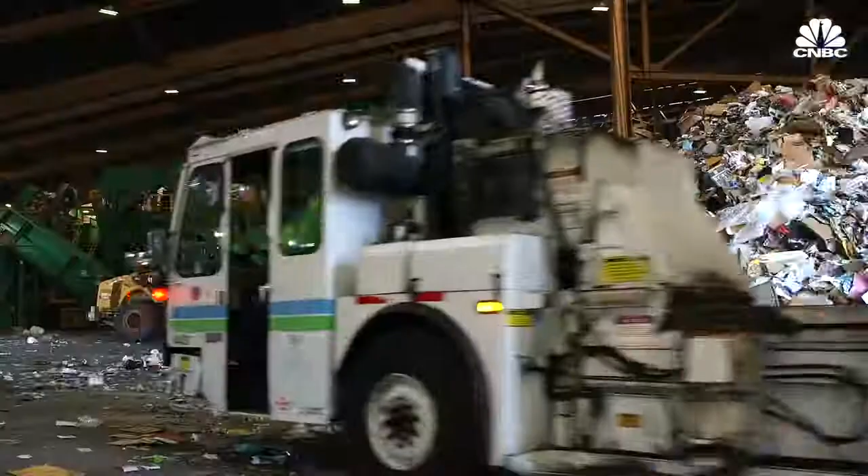Our society produces a lot of waste, over 2 billion tons per year, a number that's expected to grow by 70% by 2050. That's a line of garbage trucks stretching from San Francisco to New York City every single day.

Organic materials in landfills decompose and produce methane, a very potent greenhouse gas. Solid waste, plastics, paper, cardboard, there's a lot of energy within those, carbon and hydrogen. Why don't you do something useful with it?

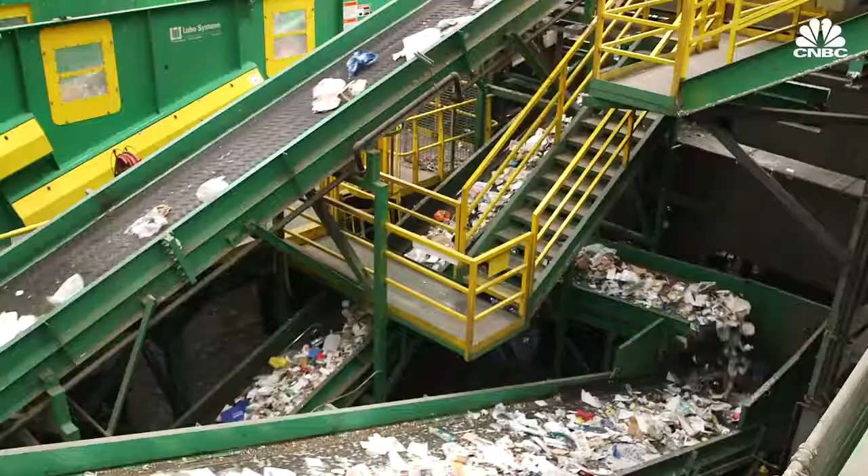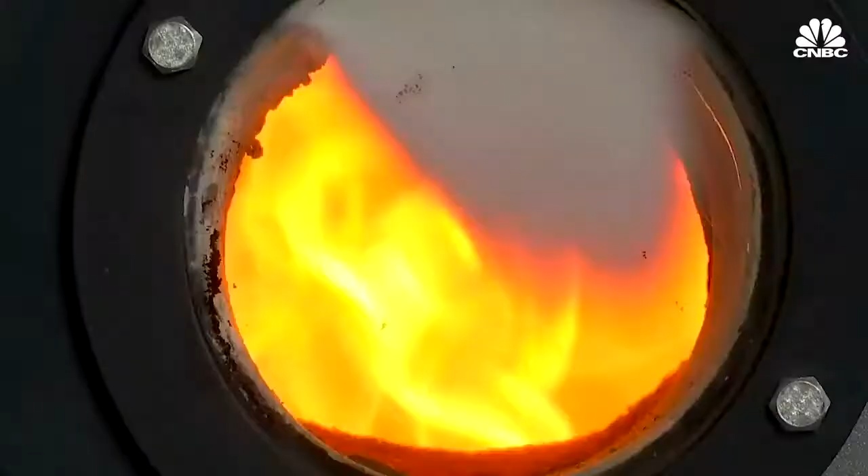Converting waste into energy is not a new idea. Usually, though, this has meant incineration, that is, burning our trash to recover some energy. But that has major drawbacks. Incineration creates toxic ash and hazardous chemicals called dioxins, and heat and electricity are pretty much the only usable outputs.

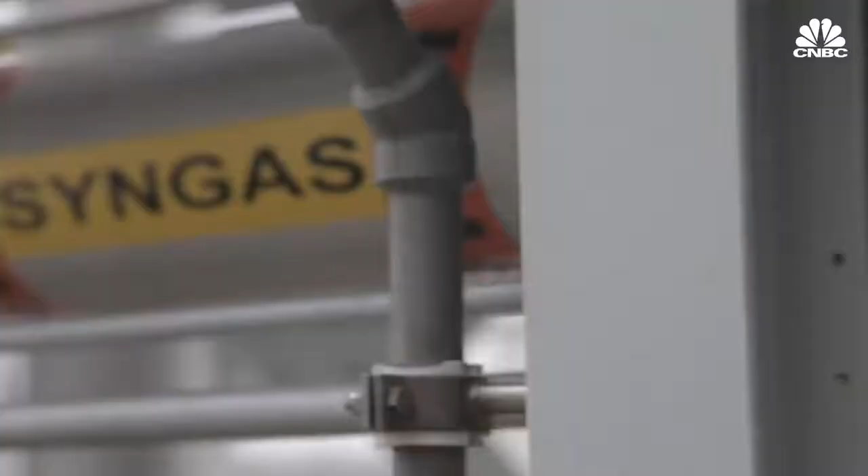A better solution may lie in gasification, an old technology which has only recently been repurposed as a way to deal with our waste. Gasification companies don't burn trash. Instead, they turn it into a gas, in a process that they say is both economical and eco-friendly. The focus is on producing a good quality syngas that can be converted into higher value energy products on the back end, be it electricity, hydrogen, diesel fuel, possibly even chemicals, fertilizer, etc.

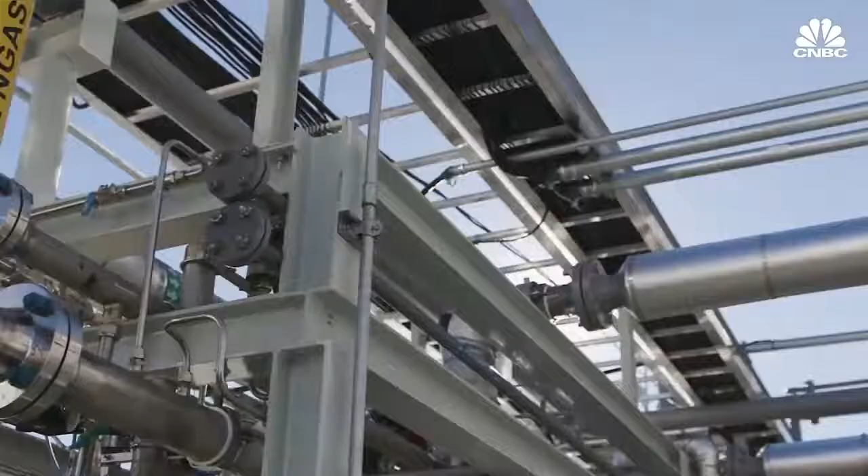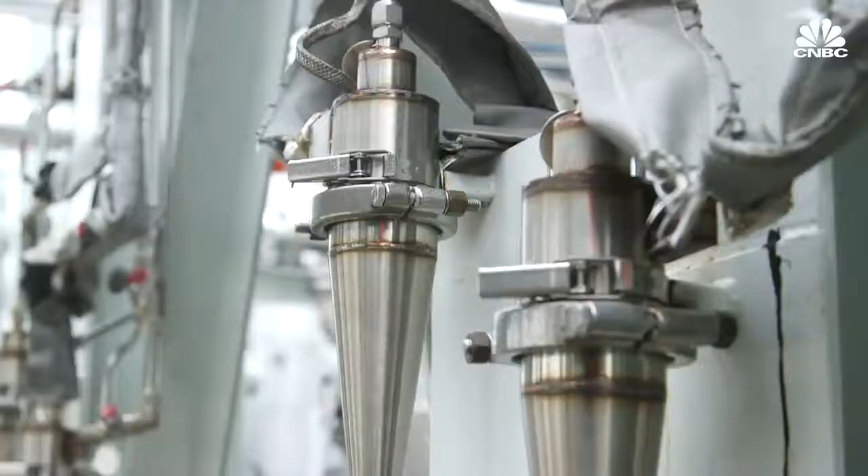It's an exciting idea, and some major players, including the Bill Gates-led fund Breakthrough Energy Ventures, have thrown their weight behind it. While in the past, gasification companies have struggled to scale up and meet their energy production targets, now companies like Sierra Energy, Enerkem, and Plasco say they're ready to commercialize and expand.

I think we have over 9,000 interested parties from around the world who've contacted us already. The question is, how quickly can we get one? The answer is soon.

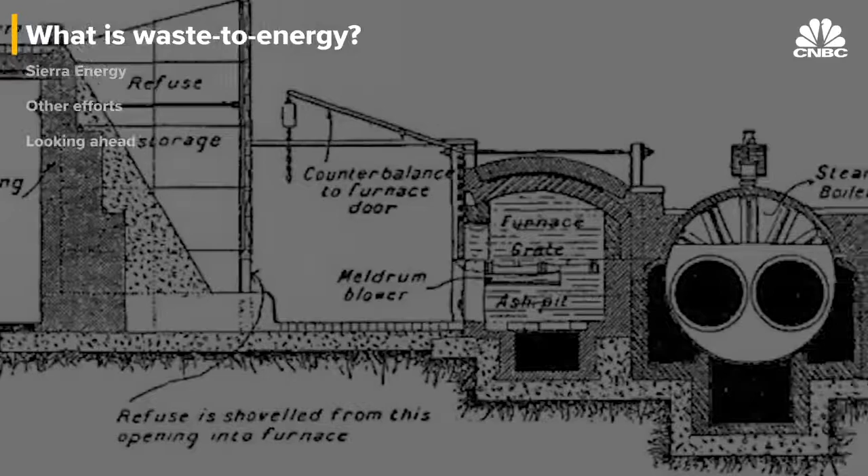The world's first municipal waste incinerator was built in 1874 in Nottingham, England. And like incinerators of today, it converted trash into ash, gas, and heat via combustion. Initially, the purpose was just to shrink our waste.

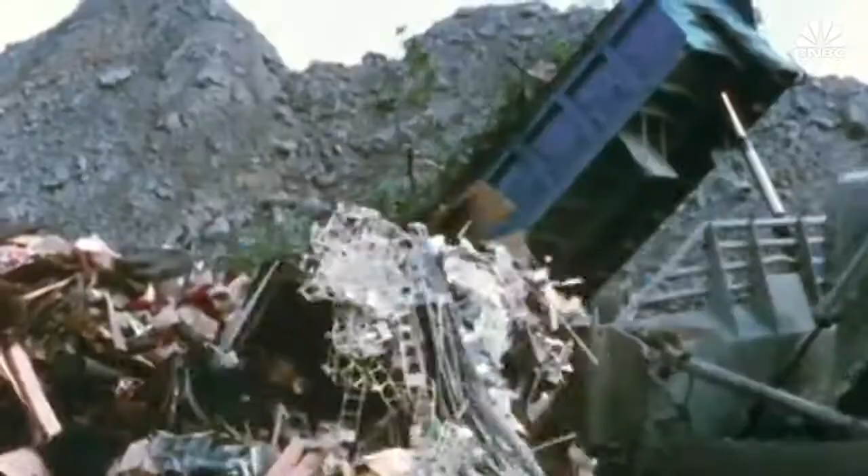Eventually, though, Great Britain and Germany did start recovering energy from the process, but the idea didn't really catch on in the US. Domestic electricity prices were already low, and as emission standards tightened, incineration got even more expensive compared to landfilling. It wasn't until the oil embargo and resulting energy crisis in the 1970s that the US really took an interest in waste-to-energy tech.

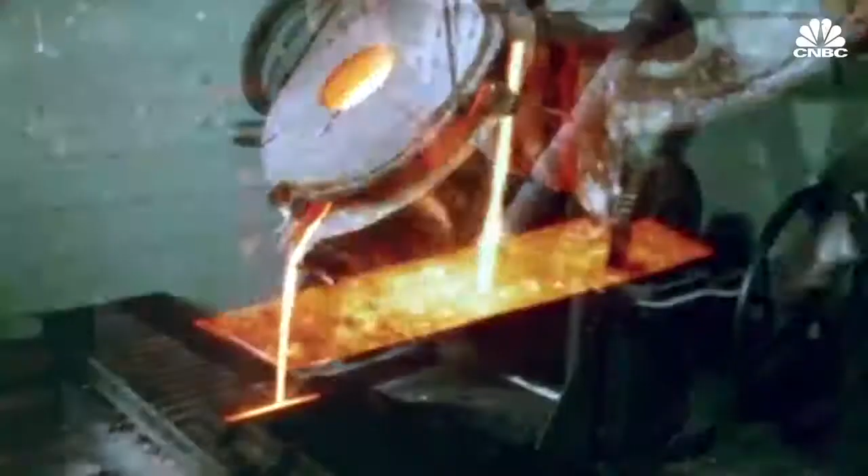Over 100 waste-to-energy incineration plants were built, but when fuel prices dropped, interest waned. You see a lot of interest in this waste conversion or biomass conversion when the fuel price is really expensive. And then when the fuel price drops, nobody really cares.

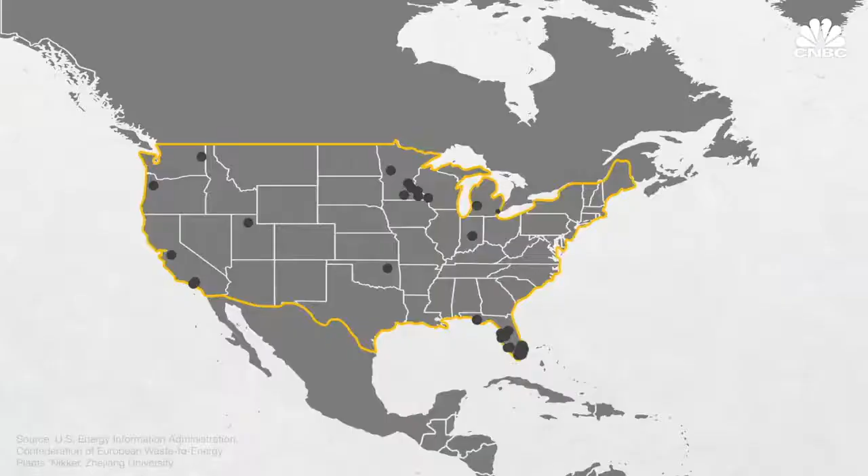Today, there are about 70 waste-to-energy plants in the US, and the number is declining. But globally, many European countries still rely heavily on incineration, and Japan and China have been building waste-to-energy incinerators at a rapid clip. But many environmentalists say we need a better solution.

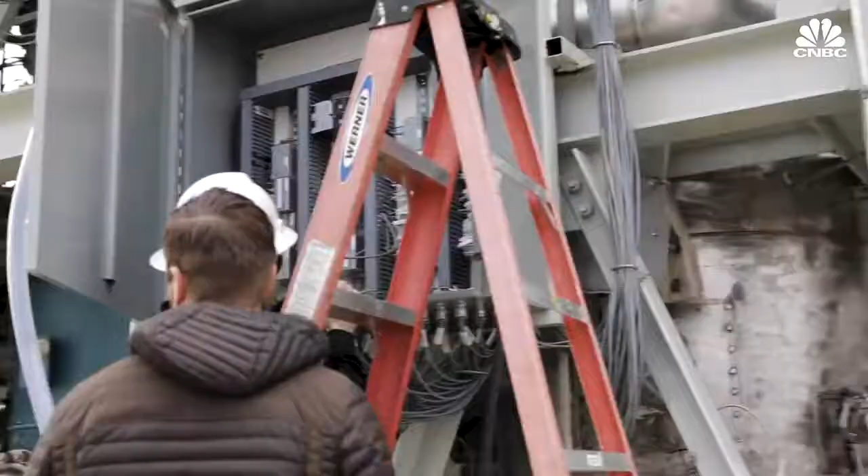Incinerators still emit harmful pollutants, especially in countries with lax environmental regulations. So burning waste to get rid of it may appear to be cheap, but the long-term health consequences for the community are terrible. So companies like Sierra Energy are looking towards gasification, an old technology that proponents hope to repurpose as a cleaner and more economical waste-to-energy solution.

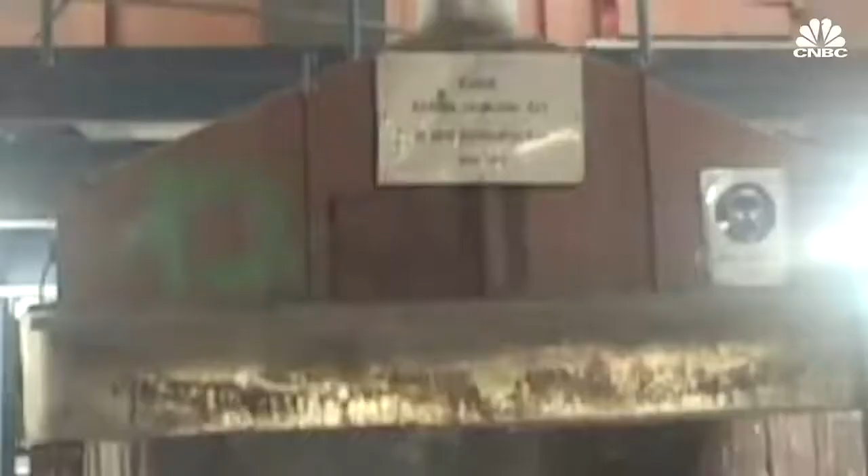In the gasification process, materials aren't combusted. No toxic ash or dioxins are produced. Instead, a highly controlled amount of oxygen or steam reacts with the waste, turning it into a gaseous mixture of carbon monoxide, hydrogen, and other elements.

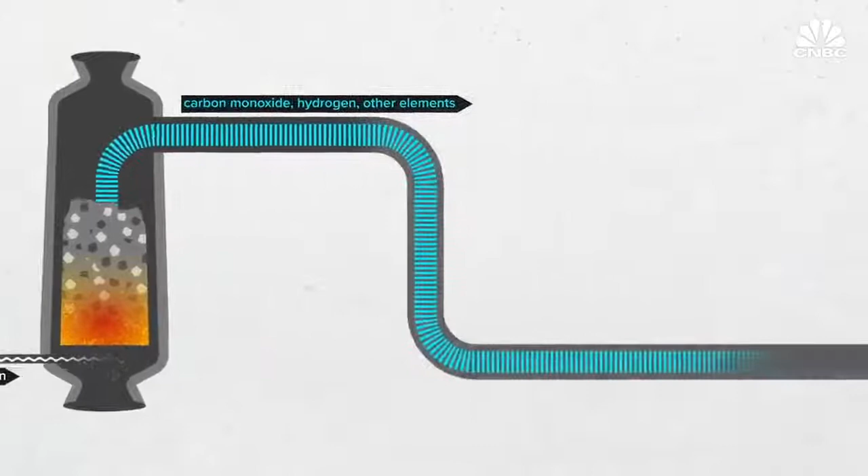This synthetic gas has applications beyond electricity generation. It can be converted into high-value products like diesel fuel, hydrogen fuel, or ethanol. So even if electricity prices stay low, there'll be a market for these outputs.

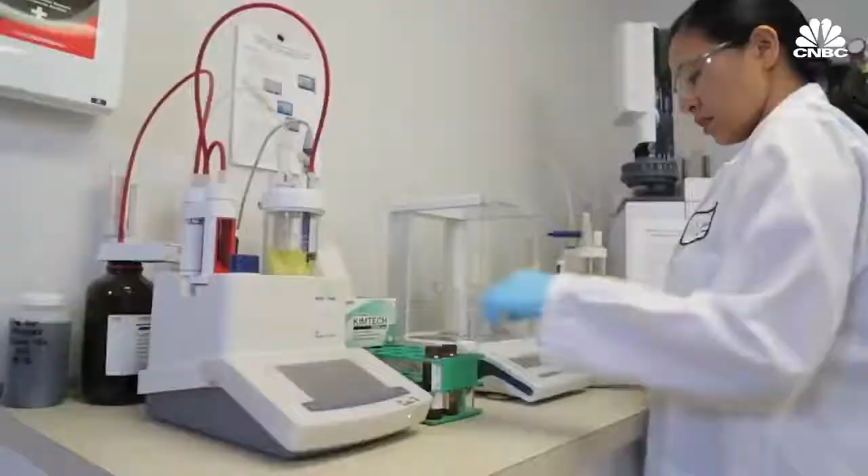We see much more value in chemicals and biofuels. Methanol is an important building block in the chemical industry. Ethanol, of course, can be blended in fuels.

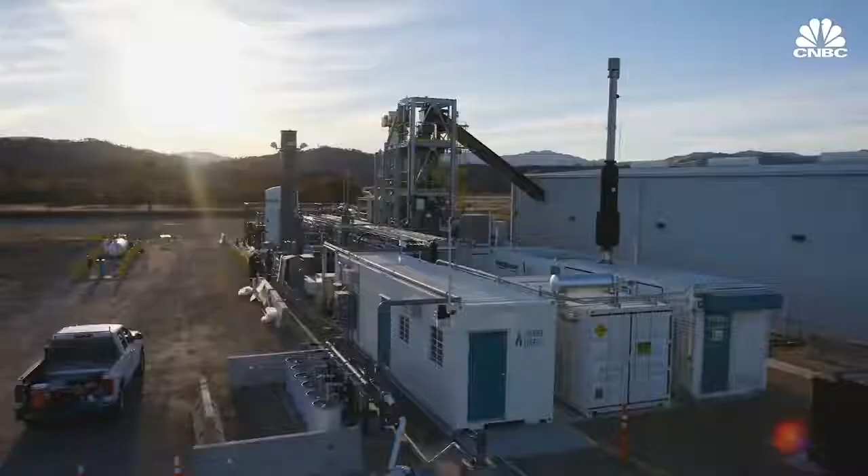In this way, waste-to-energy gasification plants have both upstream and downstream revenue potential. On one side, you're being paid to take garbage that normally would be dumped into a landfill. So that's one source of revenue.

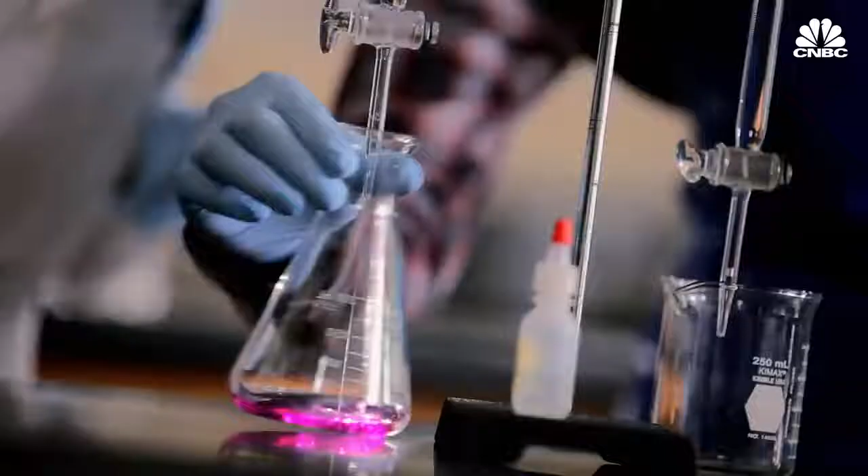You then take that waste and you turn it into recycled products. Those products have very high value. And so from a business model perspective, you're getting paid on both ends.

But a main challenge facing companies like Sierra Energy, Enerkem, and Plasco is dealing with the unpredictability of using municipal solid waste as the fuel. Globally, there are hundreds of gasification plants that generate electricity from fossil fuels like coal, but waste-to-energy gasification is a whole different game. Tailoring your gasification when your fuel changes over time is the holy grail.

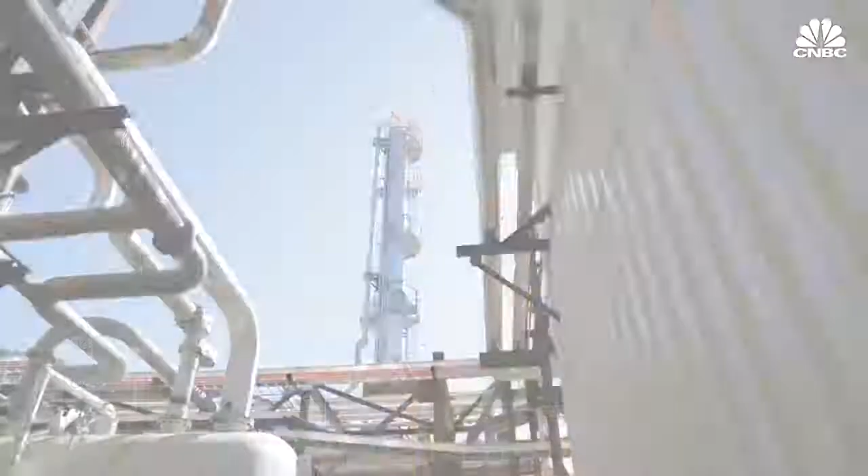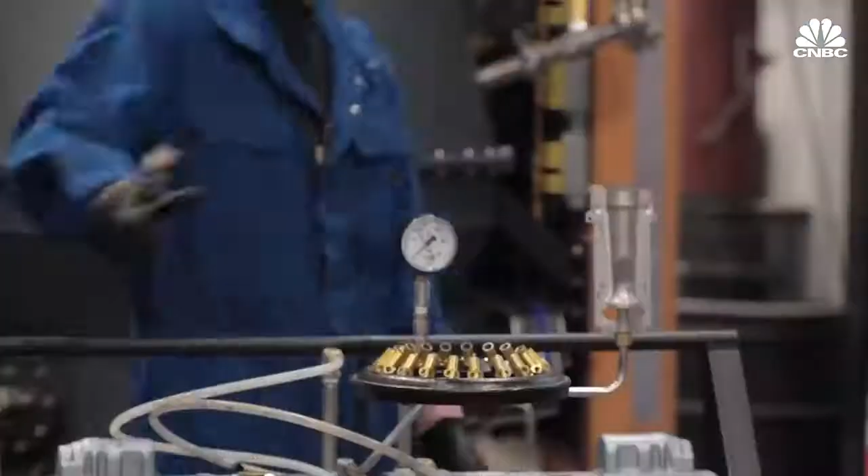Davis, California-based Sierra Energy was founded in 2004. Back then, CEO Mike Hart, who is also CEO of Sierra Railroad Company, was seeking to improve the fuel efficiency of his locomotive fleet. We were trying to figure out a way to make our own fuel. We wanted to do something better than diesel.

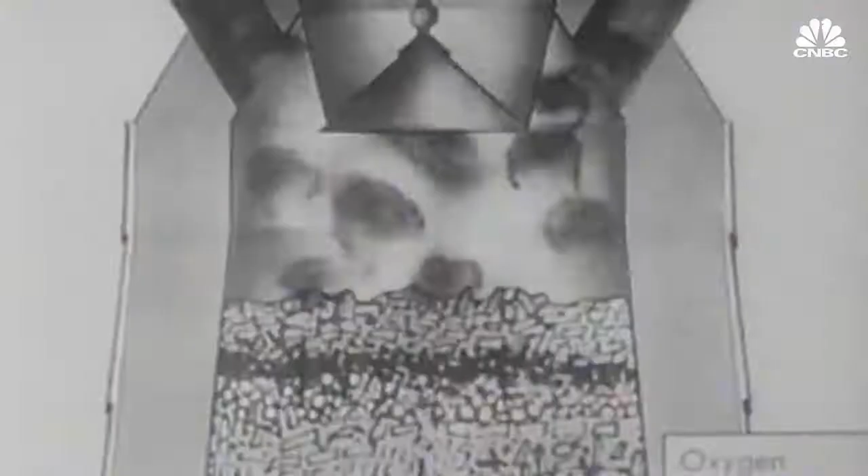He was judging a business competition at UC Davis when he heard about how blast furnaces, one of mankind's oldest technologies, could be used to convert any mixture of materials into a usable synthetic gas. Hart bought the patents to this technology, and Sierra Energy was born.

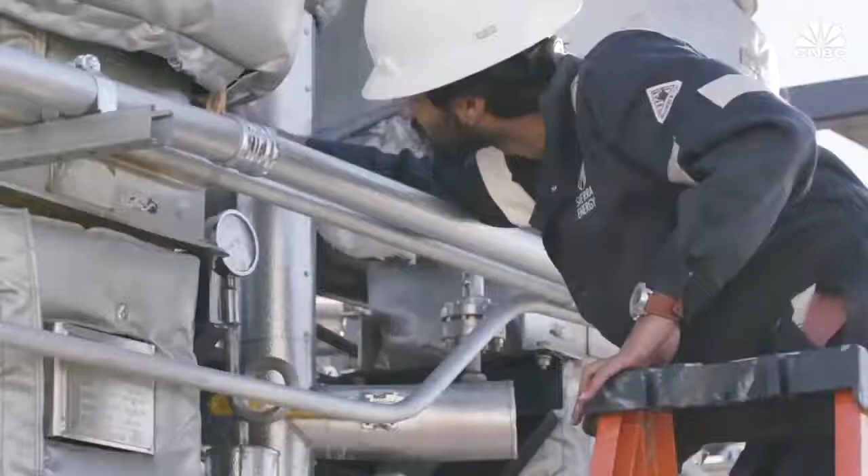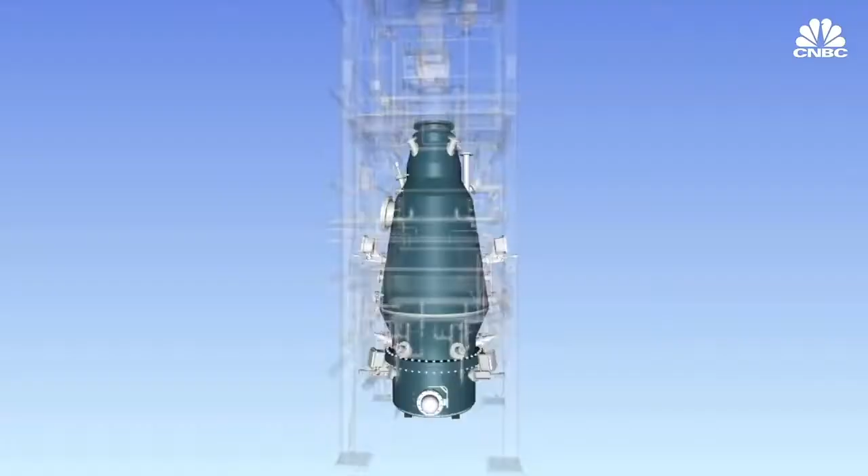Over time, its mission expanded far beyond its initial reach. People are realizing that climate change is a very real problem. When you throw away 1 ton of garbage, about 6.2 tons of CO2 equivalent goes into the atmosphere in the form of methane. Methane is 86 times more potent a climate change gas than CO2 over a 20-year period. Our technology provides one way of trying to address that problem.

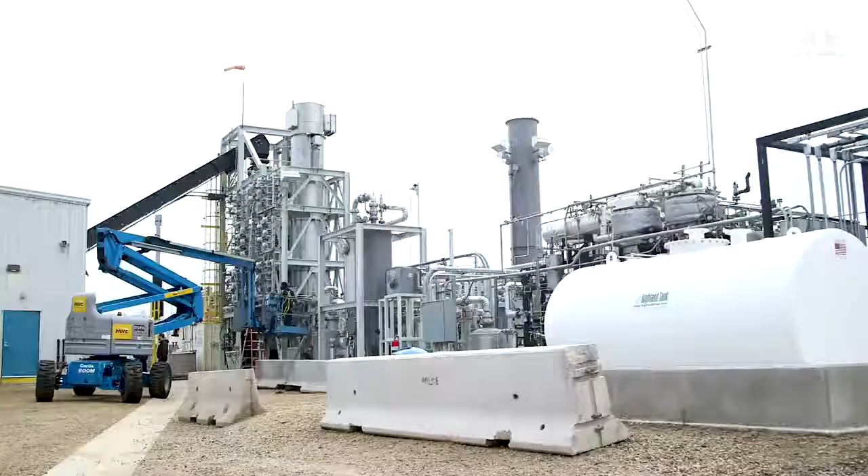Last July, Sierra Energy closed its $33 million Series A funding round, led by Breakthrough Energy Ventures, the Bill Gates-led investor fund that also includes Marc Benioff, Jeff Bezos, and Richard Branson. Now, the company has partnered with the Department of Defense to develop its first small-scale commercial facility at Fort Hunter Liggett in Monterey County, California.

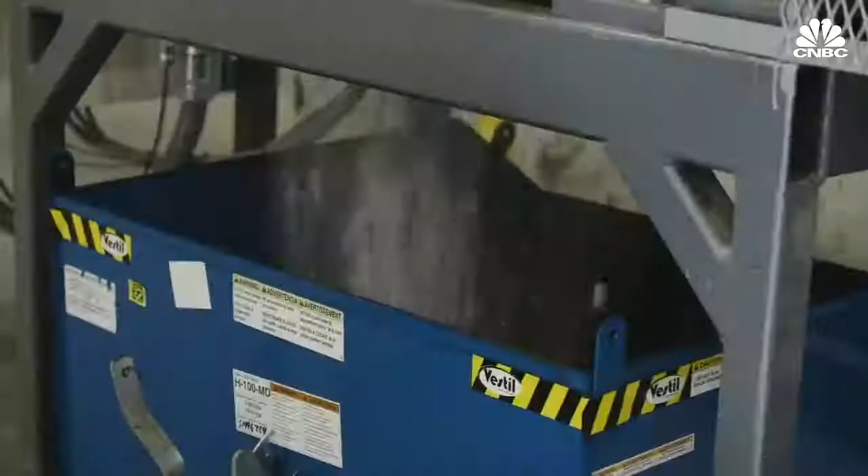This demo facility can handle 20 tons of waste per day, and if all goes according to plan, it will begin processing trash in early 2020.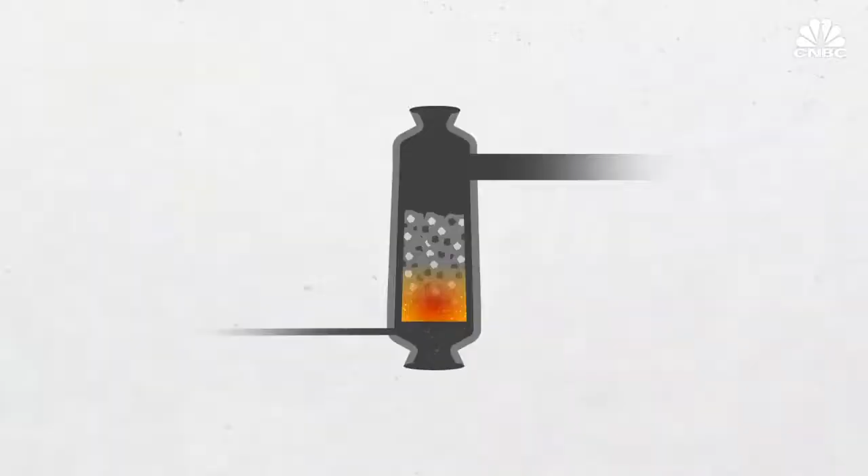Ultimately, Sierra Energy says what sets them apart is their use of the blast furnace, a centuries-old technology in the iron and steel industry. Here's how it works. A blast furnace, which is the technology platform that Sierra Energy uses, is a high-temperature vessel. Solid materials go in at the top, injectant gases are placed in at the bottom, and you have a big countercurrent heat exchanger. We're injecting oxygen and steam at the base instead of hot air.

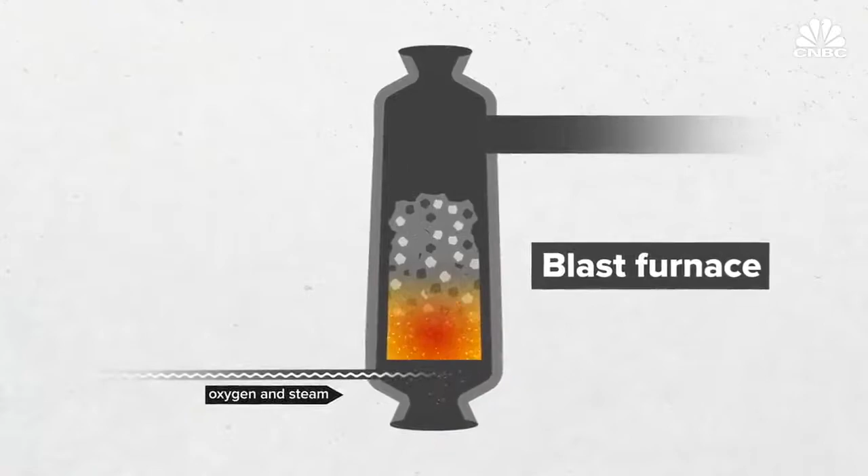And at the top, we're placing in solid waste materials instead of those mined materials from the ground. And instead of the focus being producing good quality metal out the bottom, our focus is on making a good quality syngas, synthesis gas, out the top of the vessel.

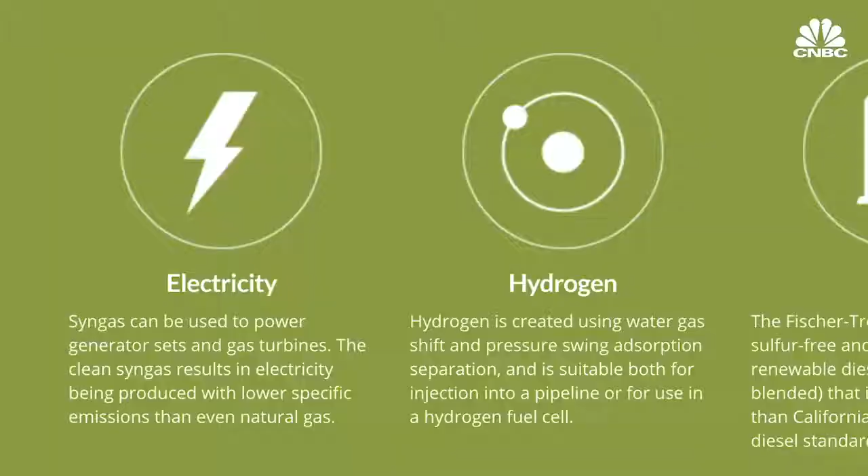Once the syngas is produced, the local community or developer will decide what to do with it. The company lists electricity, hydrogen, renewable diesel fuel, and ammonia as likely end products. About 10% of the waste material can't be converted to gas, and so is instead turned into a stone that can be used as construction material.

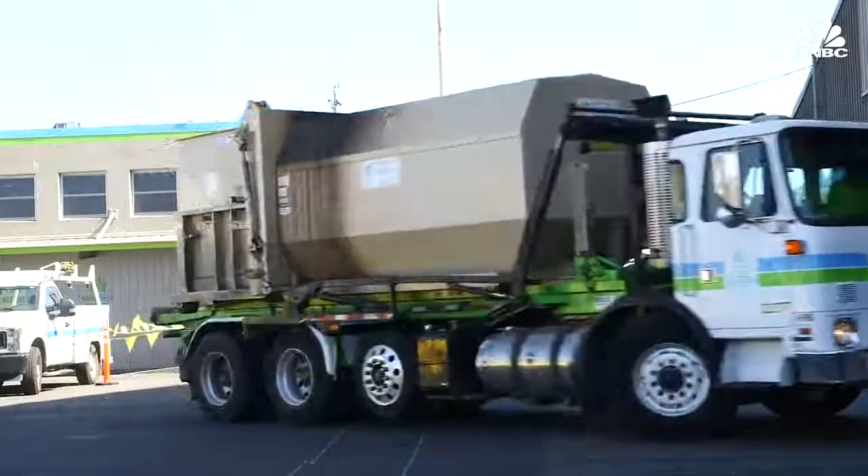Because of this wide variety of use cases, it's hard to say for sure exactly how clean the end-to-end process will be. It really depends on the specifics of the project, how far waste is having to be brought to the location, and some of the configuration of the plant itself.

Hart is confident, though, that in almost every case, it will be carbon negative. Because even if you're making electricity or diesel for a vehicle, the amount of pollution that comes out of the tailpipe or smokestack is less than the amount of emissions that you're offsetting in the first place.

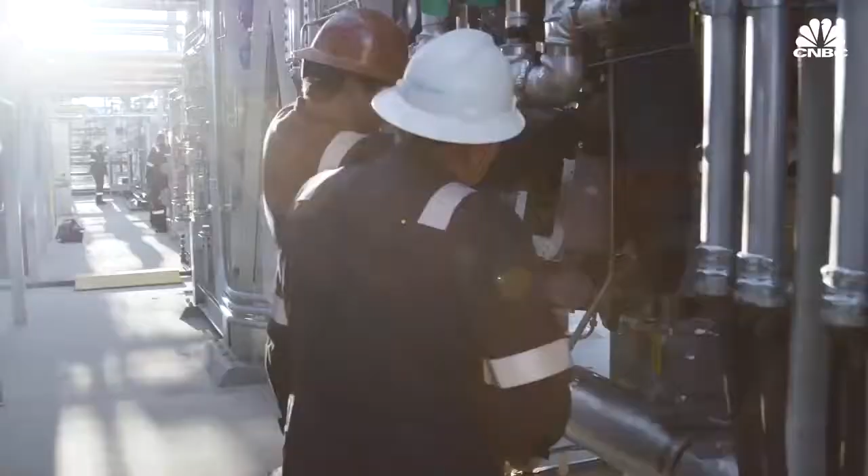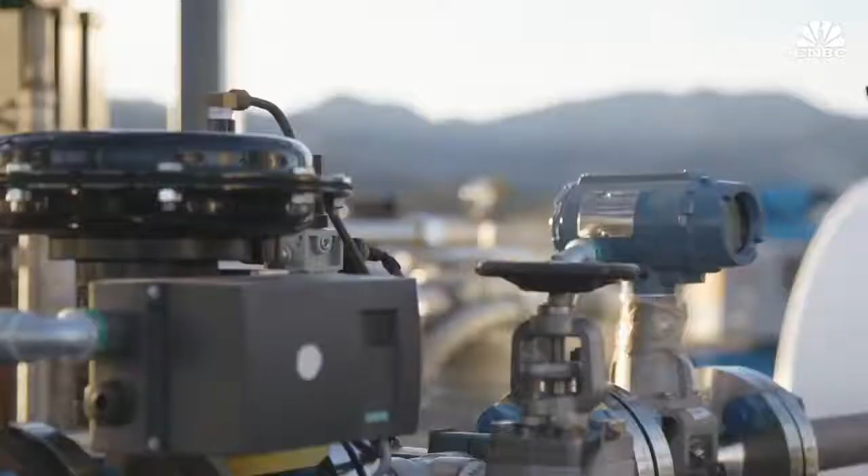Furthermore, Sierra Energy's plant doesn't rely on external energy to operate. Instead, Hart says that about 20% of the energy created is used to run the plant itself. And so by some people's analysis, you can make this carbon negative or carbon neutral. By other analysis, you can't quite get there, but it's certainly cleaner than fossil natural gas.

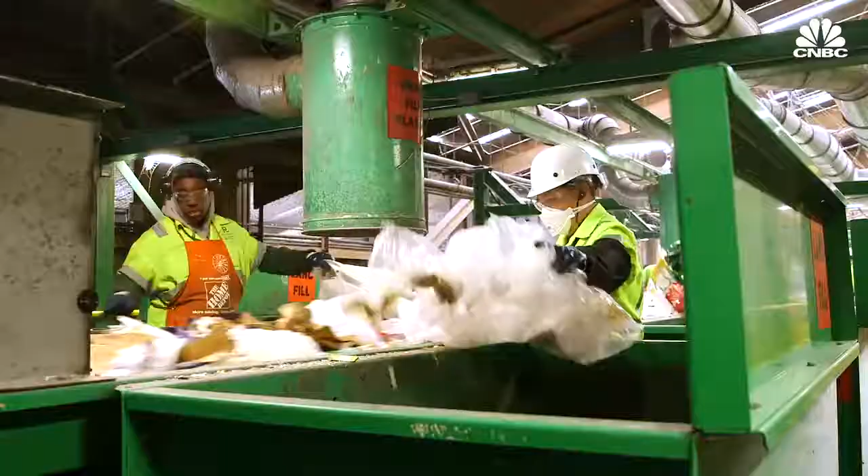Over the next few years, Hart says the company plans to build out community-scale systems that can handle about 50 tons of waste per day, the equivalent of approximately 50,000 people's trash. If we want to have an impact on that 13.2 billion tons a year of greenhouse gas, we need to have thousands of these systems around the world as quickly as possible. That's our goal as a company.

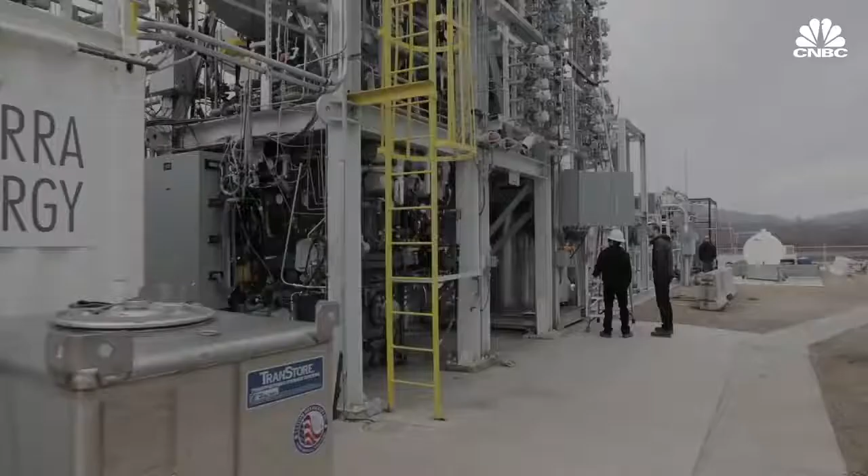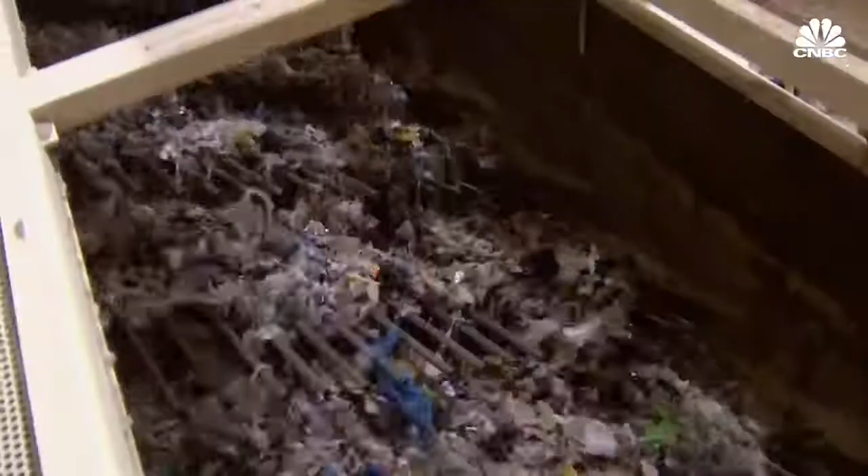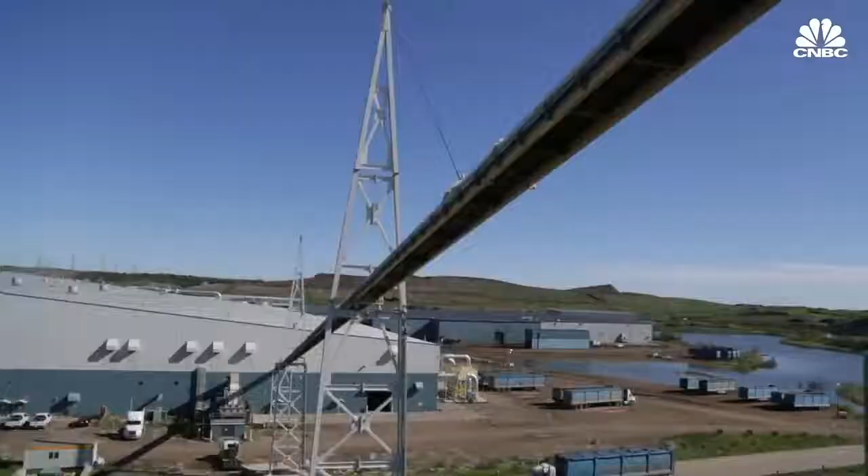While Sierra Energy's most recent funding round has put it in the spotlight, there are a number of other veterans in this space. Two of the biggest are Plasco Conversion Technologies, founded in 2005, and Enerkem, founded in 2000. Like Sierra Energy, both aim to turn municipal solid waste into valuable end products through gasification. But unlike Sierra Energy, these two companies have actually accumulated years of firsthand experience operating full-scale gasification plants, dealing with their fair share of delays and setbacks along the way.

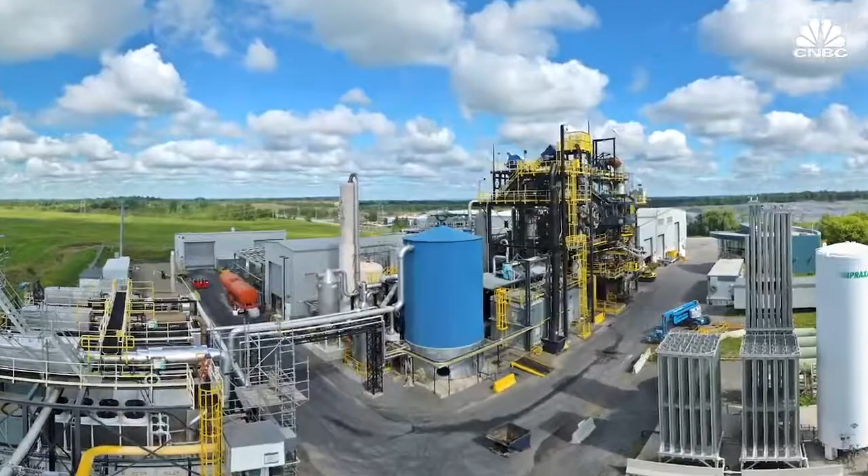Plasco Conversion Technologies uses plasma to refine the waste from gasification into a clean syngas. The company operated a large demonstration facility in Ottawa from January 2008 to January 2015, capable of accepting 135 tons of waste per day. Eventually, Plasco got approval to build a commercial-scale plant, and though the company raised over $300 million, it ultimately wasn't enough. The new plant was never built, the demo facility shut down, and Ottawa severed ties with the company.

But Plasco kept chugging along and re-emerged with a new outlook on the market. We put in 1.2 million man-hours and a decade of work and $407 million. We can tell you many ways it don't work, and what we do now does work.

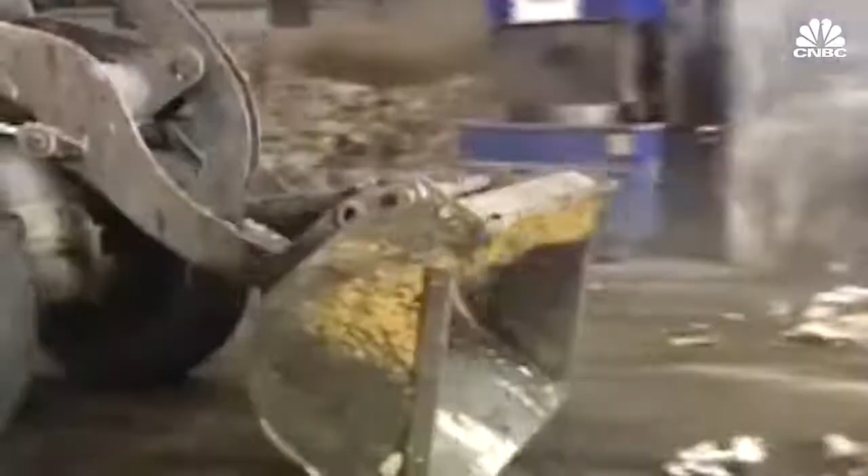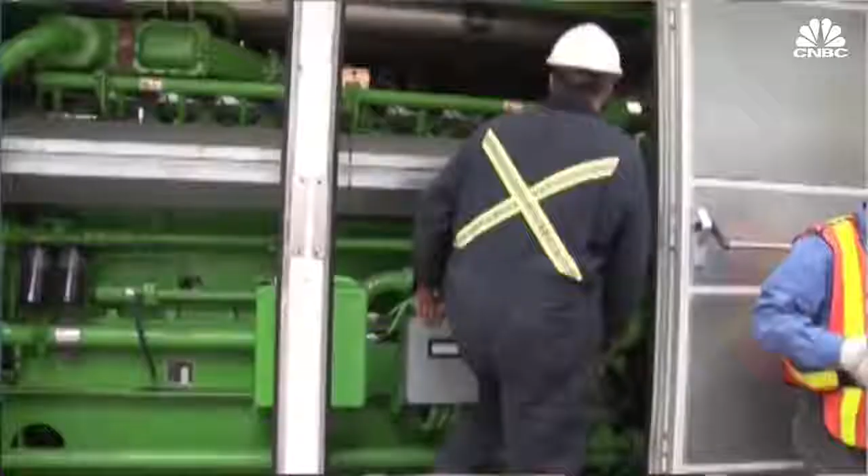In the process, we realized that the waste to electricity market, the waste to energy market, was going away. Unable to compete with the low price of natural gas, Plasco now aims to produce synthetic fuels for use in internal combustion engines, which can power cars, planes, and trains. The company no longer operates any plants, but it says there are a number of projects in the works.

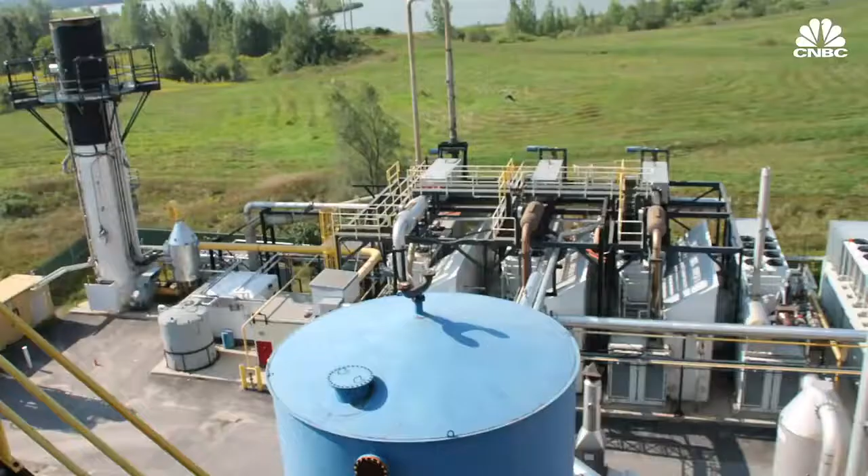And for these future endeavors, Plasco has slimmed down its business model. We aren't doing build, own, operate, transfer anymore. We're doing selling the equipment and the technology. So we restricted what we did so we weren't in competition with the entire world, but more in cooperation.

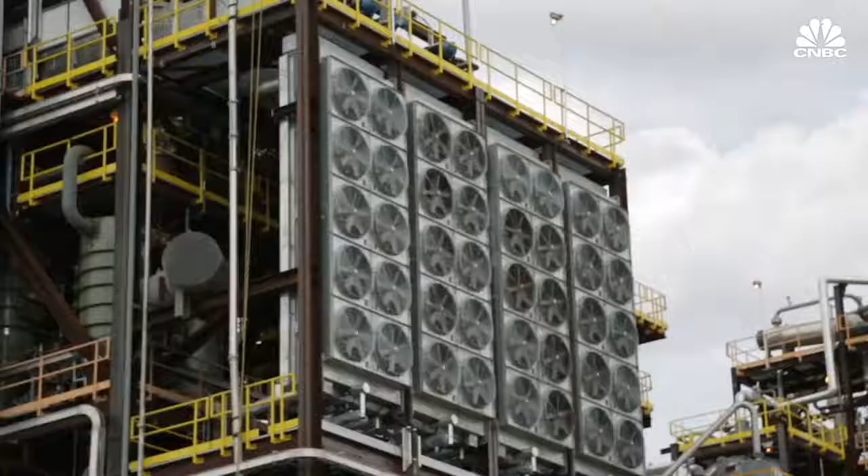Another player, Enerkem, developed the world's first commercial waste-to-biofuels facility of its kind. It's been operating in Edmonton, Canada since 2014, and is currently focusing on turning trash into ethanol biofuel and chemicals like methanol. It's a facility that can take up to 100,000 tons per year of waste, around 300 tons per day. So this type of size would represent a community of around 500,000 to 700,000 inhabitants.

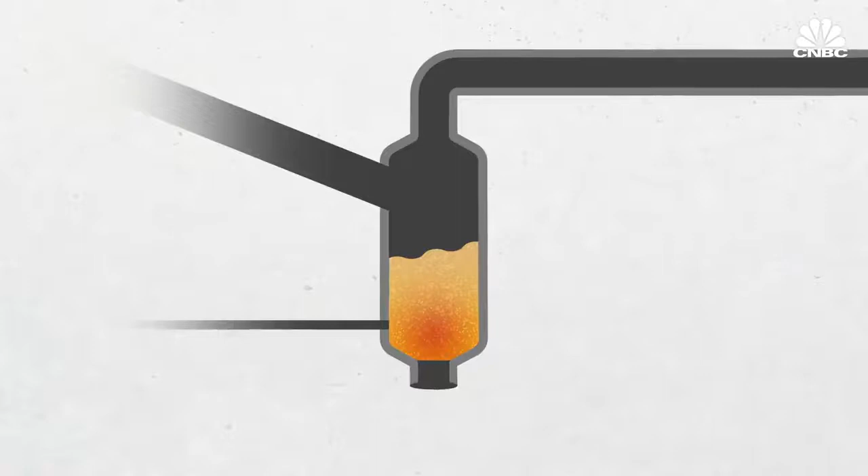This plant uses a technology called a fluidized bed gasifier, in which the trash is dropped into a bed of hot sand, oxygen, and steam. The precise mixture causes the waste to heat up and turn immediately into gas.

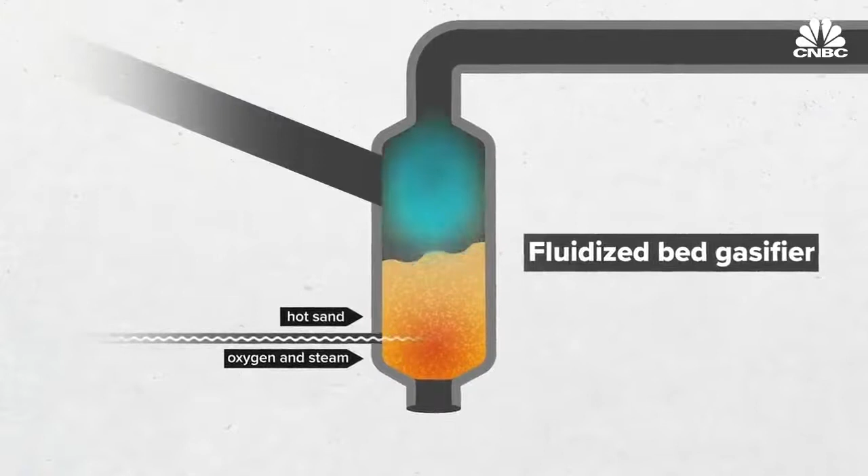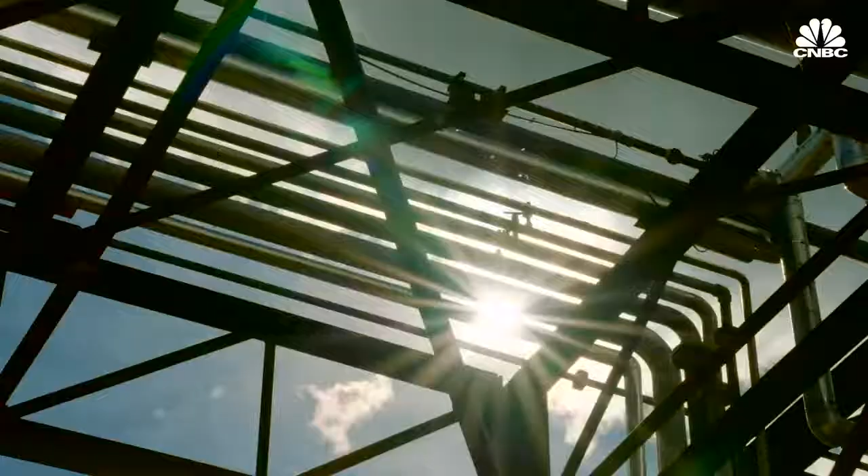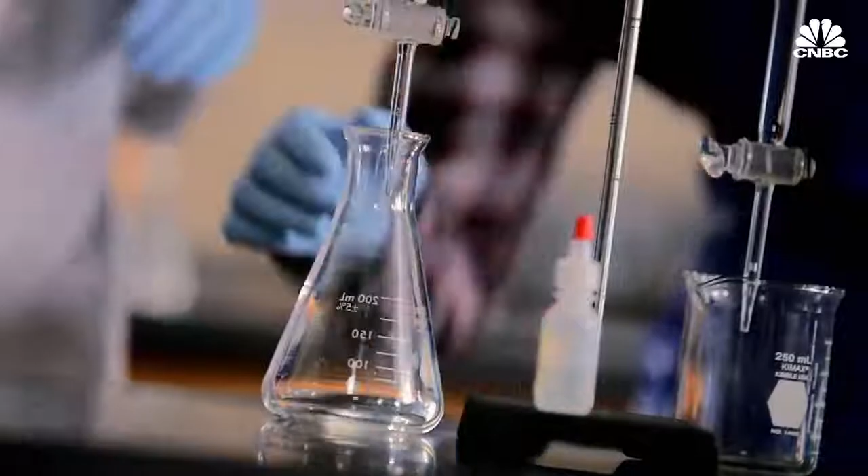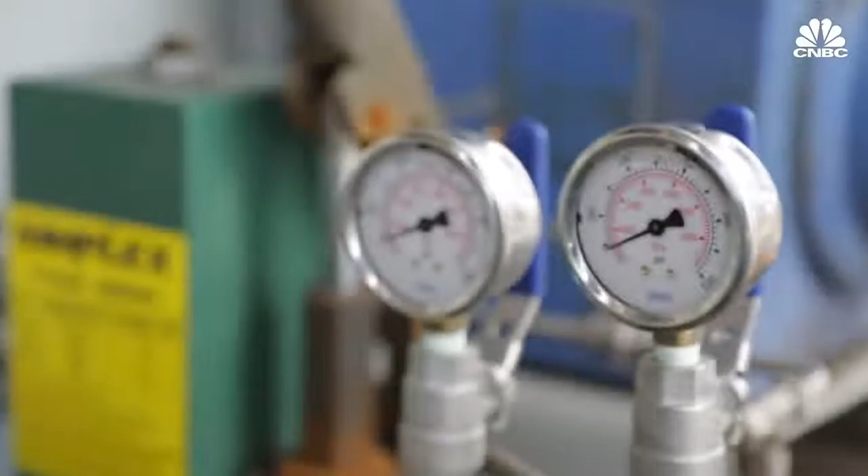We're really proud that we did not skip any steps. However, this comes at a cost. So we have both a patient approach and a realistic approach for innovations of this scale, and also we have an enormous database as well as operation time at commercial level. So these three aspects really differentiate us.

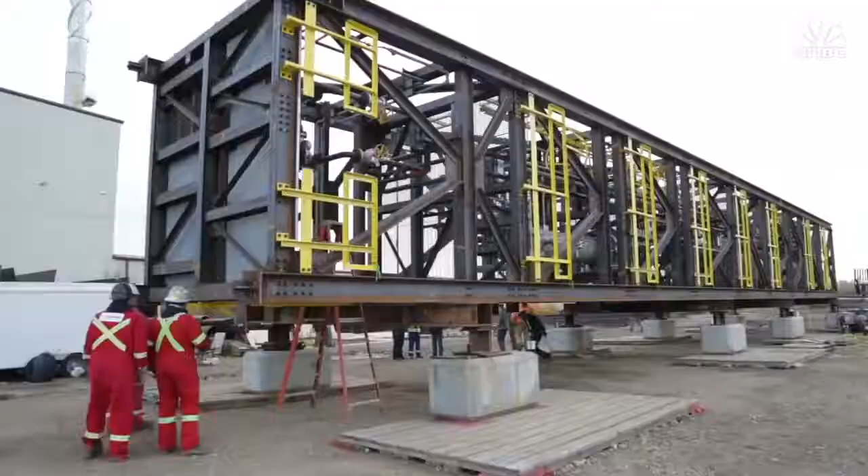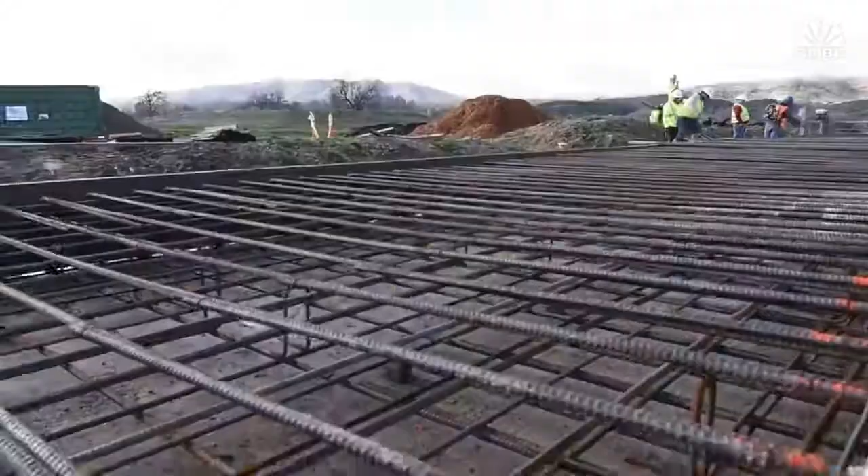In its 20-year history, Enerkem has raised $616.5 million and now has plans to build additional facilities in the Netherlands, Spain, the UK, and Canada. It's one of the most well-established companies in the space, but with just one commercial facility, there's still plenty of room for others to play catch-up and learn from what's worked and what hasn't.

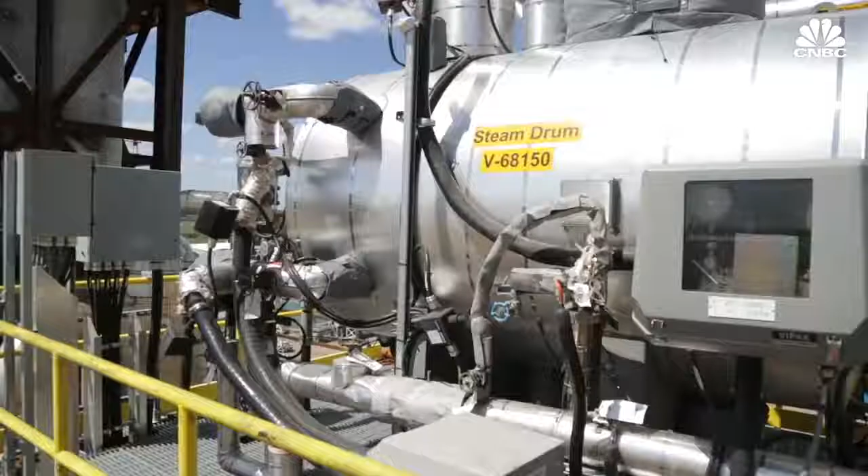Everyone likes to be in the race to be number two. The idea is the first plant, the pilot plant's more expensive, so you'd rather learn from somebody else. On this topic, I'm not at all worried. The first one at large scale may have some kinks in it, but it's also likely to get some of the best subsidies and deals from the municipality.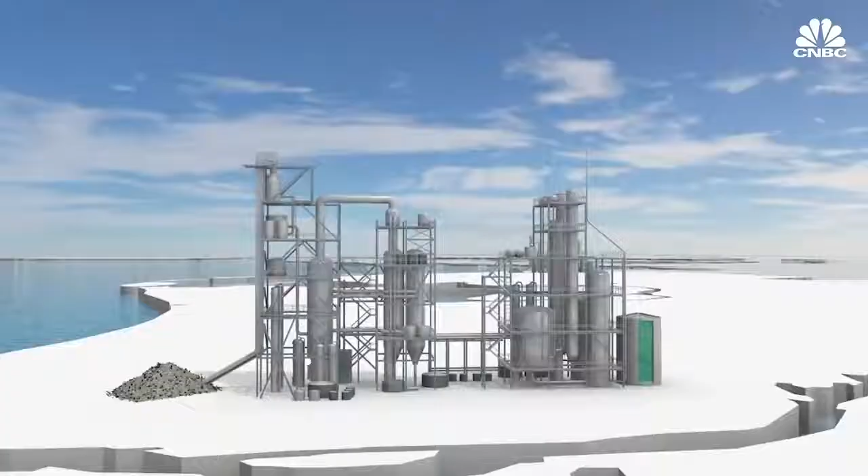These potential subsidies, alongside other policy drivers, stand to play a major role in determining how quickly this tech spreads. So the future for gasifiers is, in my view, more tied to the economics of the climate change story, the prices on carbon, the prohibitions on emitting any fossil fuels, than it is on the technology, which we've known about for a long time. Given current policies, such as California's low-carbon fuel standard, Sierra Energy says it could build many more plants, but not on the scale that they'd like to see eventually.

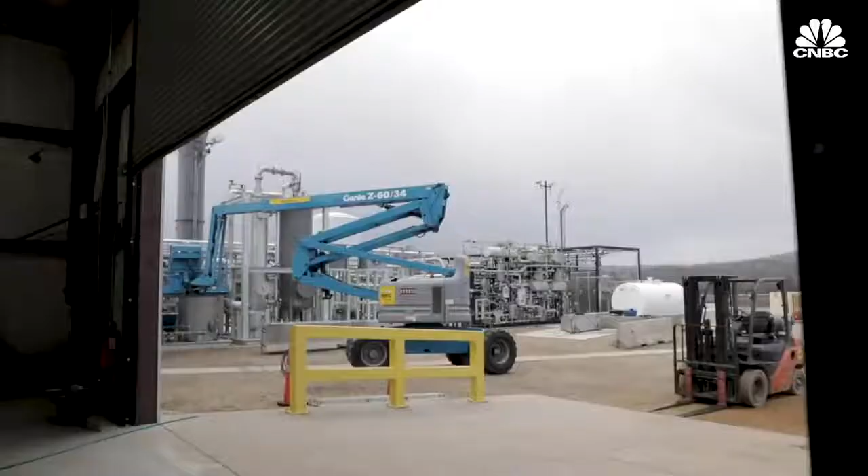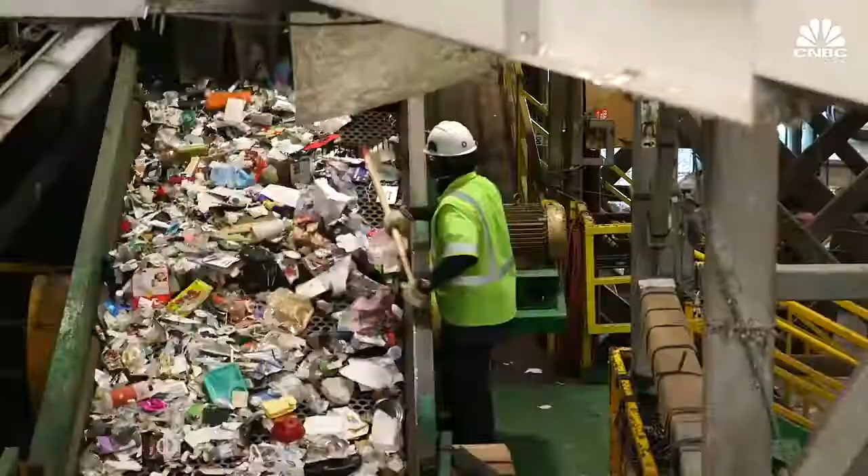To get to hundreds is very feasible, but to get many thousands, that will need different regions of the world to step up and force people to divert waste from the landfill. This could look like higher landfilling fees, carbon credits, carbon taxes, emissions regulations, or subsidies. Any and all would be a boon, so long as these gasification companies can operate as cleanly as they claim.

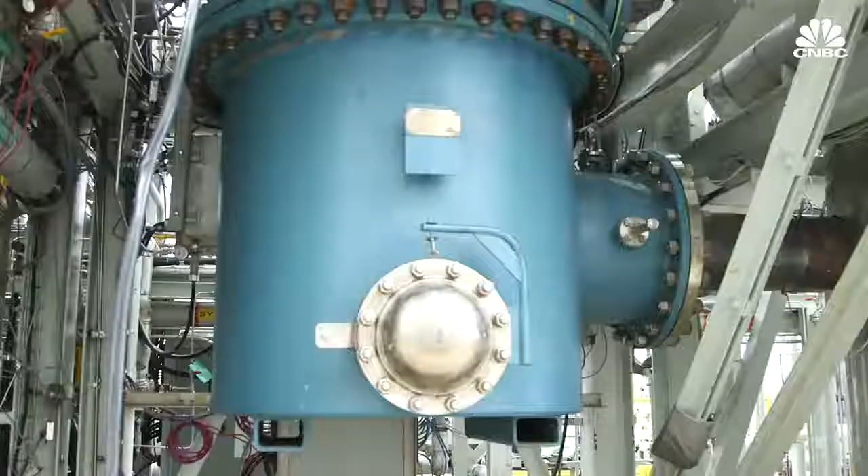But as climate policies and priorities shift in tandem with election cycles, it can be hard for this tech to establish a strong foothold. Once we know, okay, this is the policy that we're going to stick with for 10 years, I think there will be a lot of confidence for these investors. But if you don't know what the policy is going to be every 2 years or 3 years or 4 years, it's very difficult to make any decision.